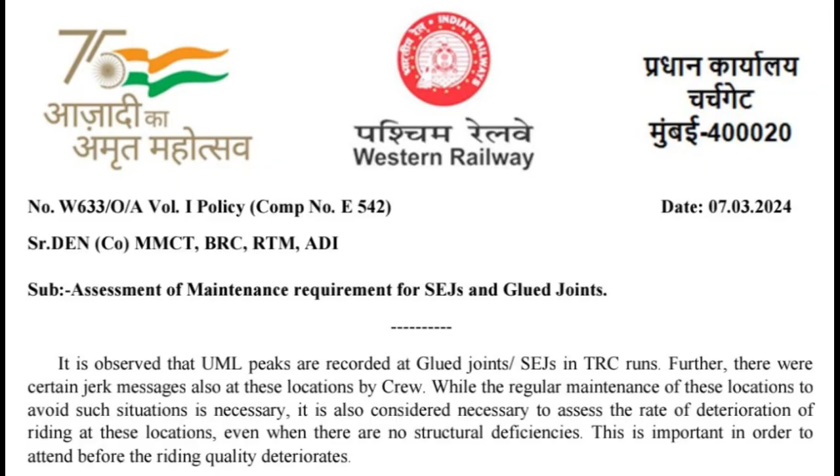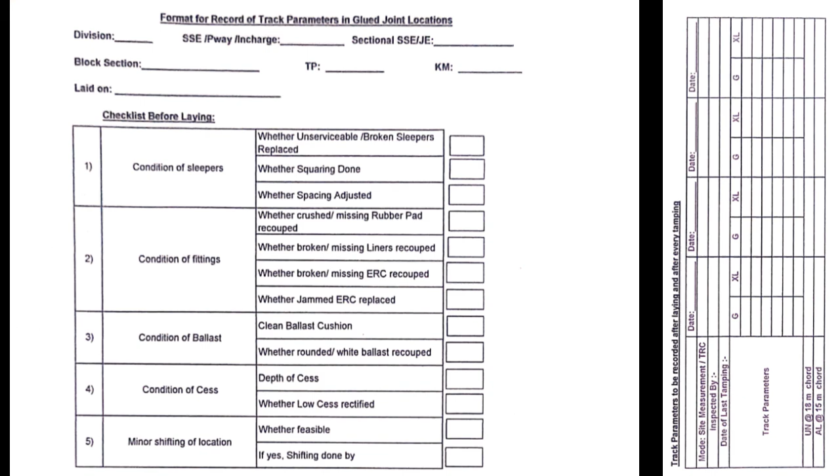A letter has been issued by Western Railway about assessment of maintenance requirements for SEJs and glued joints on date 7th March 2024, which is self-explanatory. Even so, we will discuss this crucial topic to understand it. This topic is especially important for ensuring safe and smooth train operations and is highly relevant for practical field knowledge. If you feel anywhere that the discussion differs from the soul of this letter, consult your senior official to explain better before reaching any decision.

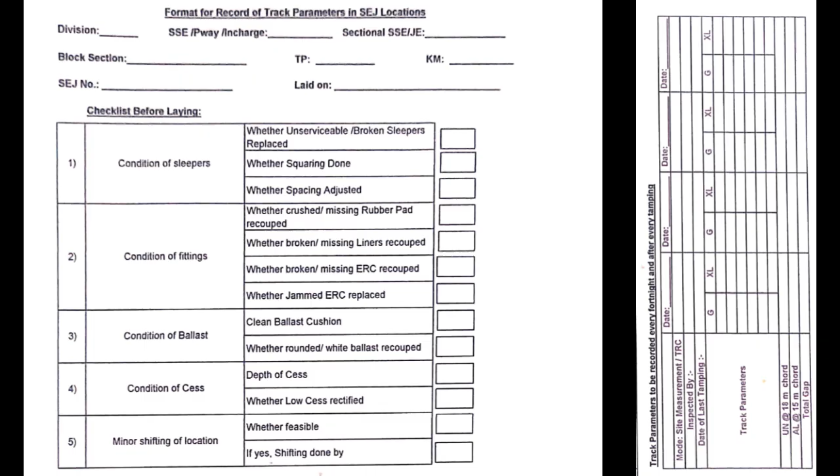It has been observed during track recording car, TRC, runs that UML peaks, which are unusual movement levels, are frequently recorded at glued joints and SEJs. In addition, crews have reported jerk messages at these locations, indicating disturbances in ride quality.

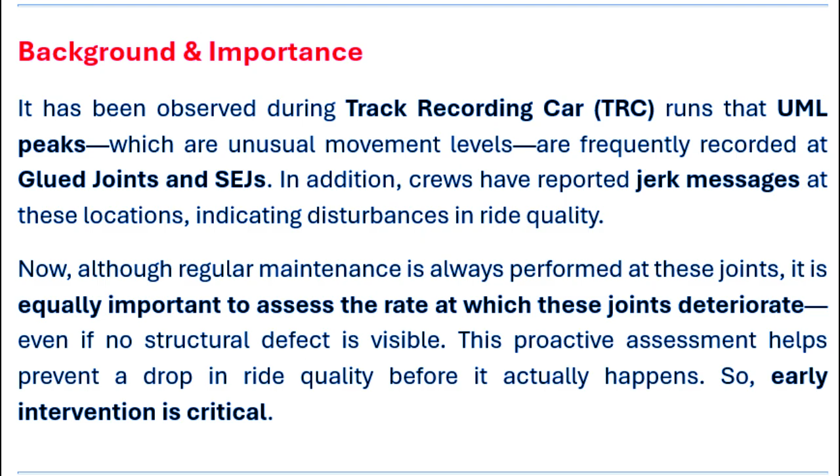Now, although regular maintenance is always performed at these joints, it is equally important to assess the rate at which these joints deteriorate, even if no structural defect is visible. This proactive assessment helps prevent a drop in ride quality before it actually happens. So, early intervention is critical.

Steps to be taken during installation of new glued joint SEJ. Let us go through the detailed steps that should be followed whenever a new SEJ or glued joint is installed in a section. 1. Sleeper condition assessment. Examine the condition of at least 15 PSC sleepers on either side of the joint. Replace any unserviceable or broken sleepers. Ensure squaring of sleepers and adjust the spacing as needed.

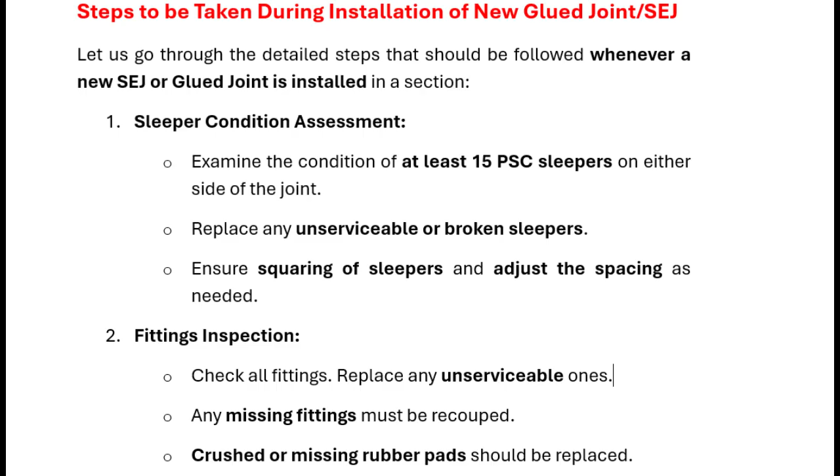2. Fittings inspection. Check all fittings. Replace any unserviceable ones. Any missing fittings must be recouped. Crushed or missing rubber pads should be replaced. 3. ERC condition. Any jammed ERC, elastic rail clip, must be replaced with a new one.

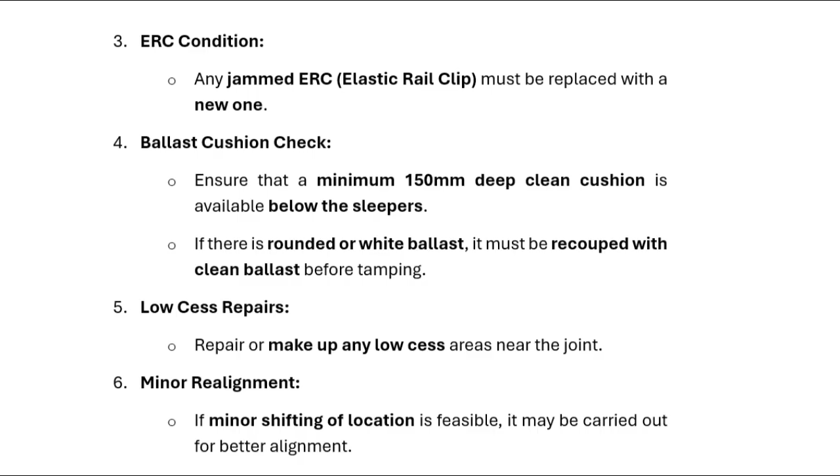4. Ballast cushion check. Ensure that a minimum 150 mm deep clean cushion is available below the sleepers. If there is rounded or white ballast, it must be recouped with clean ballast before tamping. 5. Low cess repairs. Repair or make up any low cess areas near the joint. 6. Minor realignment. If minor shifting of location is feasible, it may be carried out for better alignment.

Post-installation tamping and monitoring. Once these steps are completed, the SEJ or glued joint should be tamped using an on-track tamper with DGS, Directed General System. Tamping must be done within 3 days of laying the joint. Post-tamping parameters must be recorded in the prescribed format. Further, these joints must be monitored fortnightly.

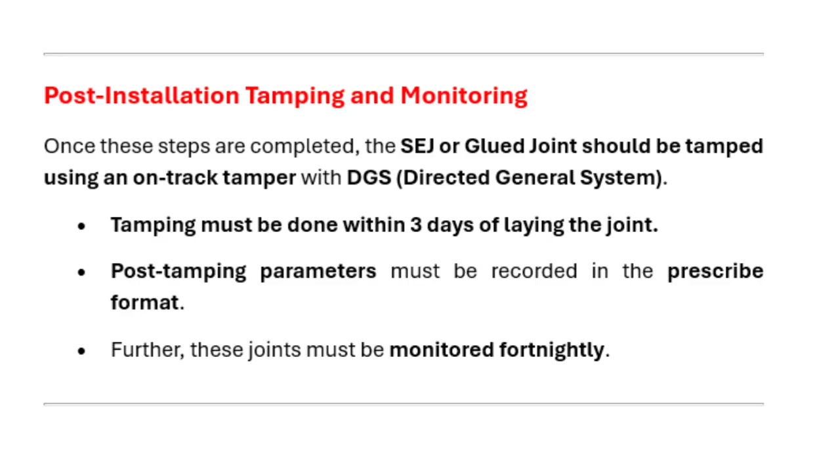Criteria for retamping. The SEJ glued joint must be retamped when any of the following conditions are met. A. The parameter reaches PML limit for a speed band of 160 km per hour during a TRC run.

B. In between TRC runs, if unevenness and alignment measurements reach 50% of NBML, narrow band maintenance limit, which is unevenness 20 mm at 18 meters chord, alignment 15 mm at 15 meters chord, and 50% value with respect to long chord: unevenness 10 mm at 18 meters, alignment 7.5 mm at 15 meters. C. Retamping may also be done based on the field officer's decision after duly recording the reason.

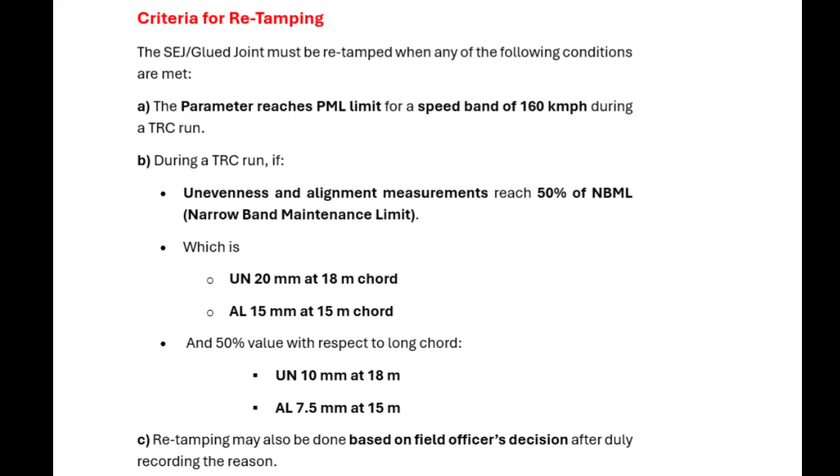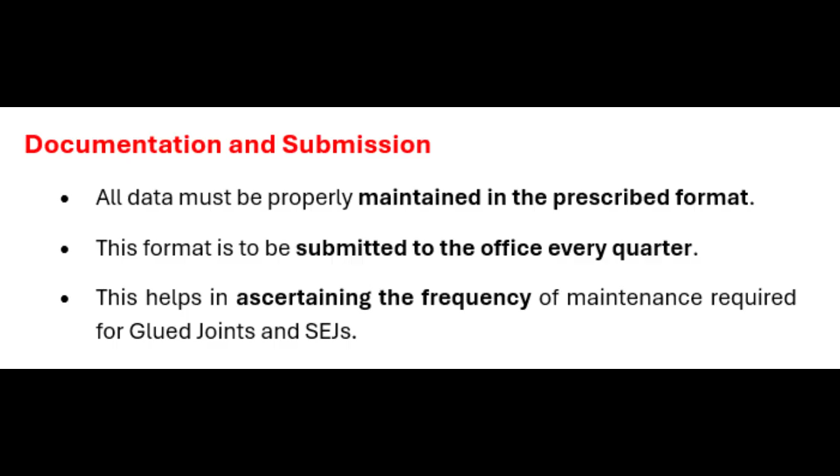Conclusion. So, to summarize, we must not wait for visible defects to start our maintenance. Regular assessments based on ride quality, track parameters, and engineering judgment are essential. Proper documentation and scheduled inspections ensure long-term track health and passenger safety. So, finally keep these points in mind for future field application. These practices uphold the standards of safety and reliability that Indian Railways is known for.